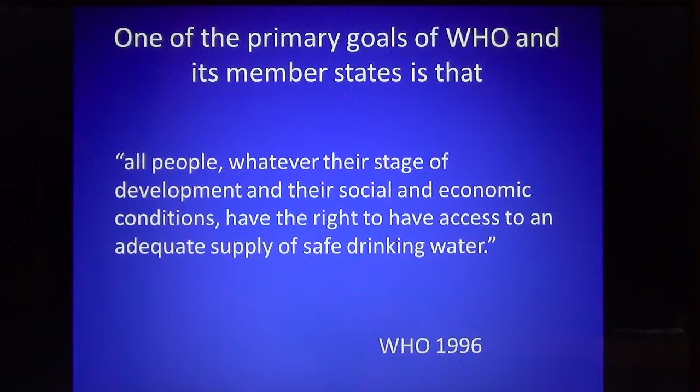This is a statement made by the World Health Organization in 1996 that all people have a right to a supply of clean, safe drinking water, and that should be no more true than here in Scotland, where we have an abundance of natural resources, in particular wind and water.

So what does happen when you build a wind farm next to a reservoir? Well, the first thing that happens is that heavy earth-moving equipment moves in to build new access roads. And this in itself is going to disturb and probably destroy the soil surface, but that's made worse by the deforestation, the cutting down of the commercial forestry. And all this will combine to churn up the surface soil and expose the underlying peat, which can become unstable and liquefied. And this peat may be up to 8 metres in depth, for example at Whitelee.

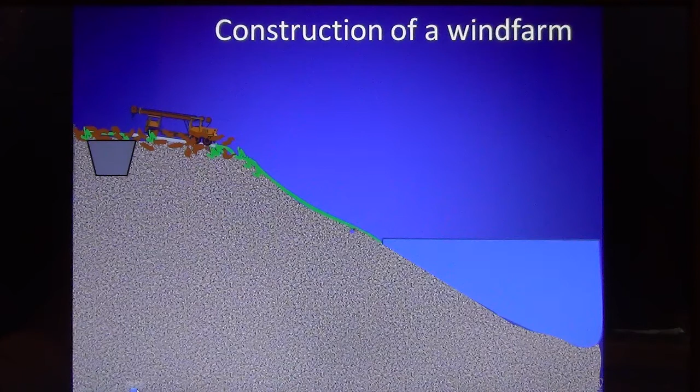All that is made even worse by the digging of turbine foundations, which can be up to 40 feet deep. And again, the multiple vehicle movements necessary to bring in the turbine components will only add to the surface disturbance. And all this together with drips from engines, gear oil drips, and the occasional diesel spill, combined with what in the west of Scotland is almost continuous rain, has the potential to wash downhill and into the reservoir.

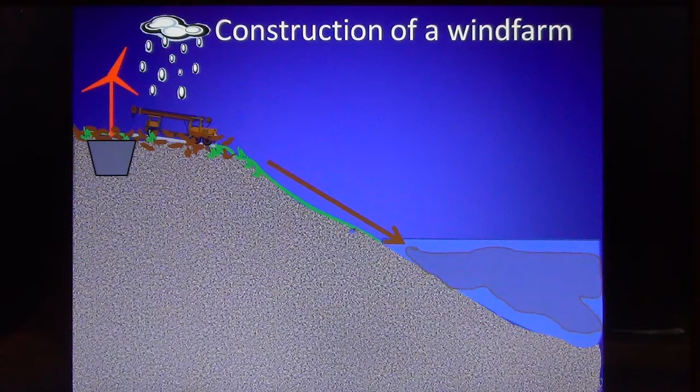But of course, any self-respecting wind farm construction company will tell you that they put mitigation in place to stop exactly this happening. But unfortunately, this mitigation, these sediment traps, are often overwhelmed by the volume of liquefied peat and the rain washing down, so that there is the potential still for these contaminants to wash into the reservoir and cause water contamination. And this is Craigendunton Reservoir, our local reservoir which supplies water to the Amlaird water treatment works to 50,000 homes in North Kilmarnock and the Irvine Valley.

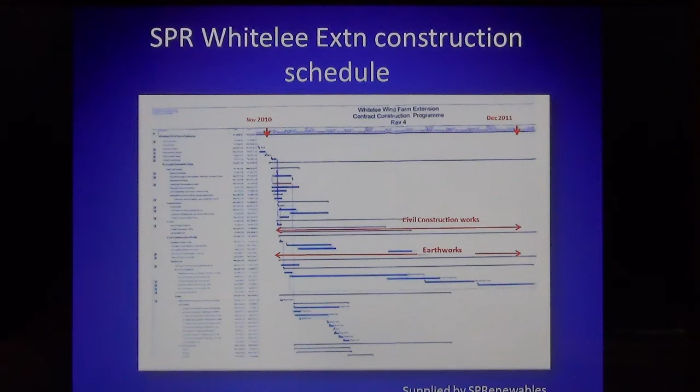Before we point the finger of blame at anybody for contaminating the water, it's important for us to understand what was going on in the construction period at any one particular time. This is an example of the Scottish Power Renewables Whitelee Extension 1 and 2 construction schedule, and I also have the original Whitelee construction schedule. What it shows is that most of the heavy earthworks occurred for the extension between November 2010 and December 2011, although it's apparent that a lot of these earthworks and construction works were going on after December 2011, and that was also apparent from site visits.

Let's look in a little more detail as to what actually happened in the raw water from Craigendunton Reservoir during those construction periods. Many Scottish reservoirs have a problem with brown and discoloured water, which is usually due to excessive dissolved peat, but also reflects the amount of iron and manganese in the water, and this can vary considerably over the course of the year according to the season and the amount of rainfall.

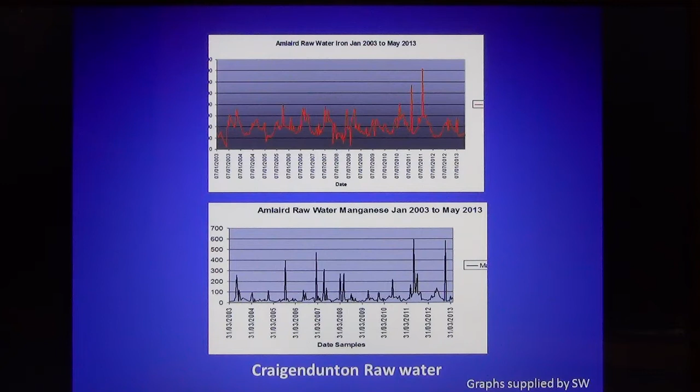But what happened here, if we superimpose the construction periods, is that during the building of Whitelee Extensions 1 and 2, the spikes of iron in the raw water almost doubled, and similarly the manganese content of the water also went up, much more than you'd expect to see with seasonal variation.

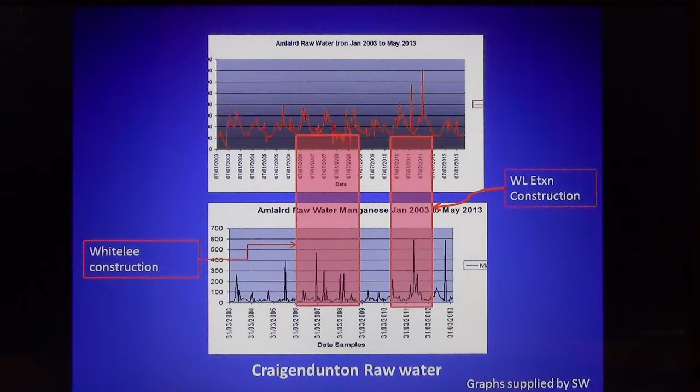During the original Whitelee construction, these changes were less marked because the turbines were very much further away from Craigendunton. And during this period in 2011, Scottish Water was successfully prosecuted for recurrent discharge of excessive manganese and iron polluting the nearby burn of Crawfordland from the Amlaird water treatment works. And you can see from the photograph below that this is really pretty disgusting stuff that's being discharged.

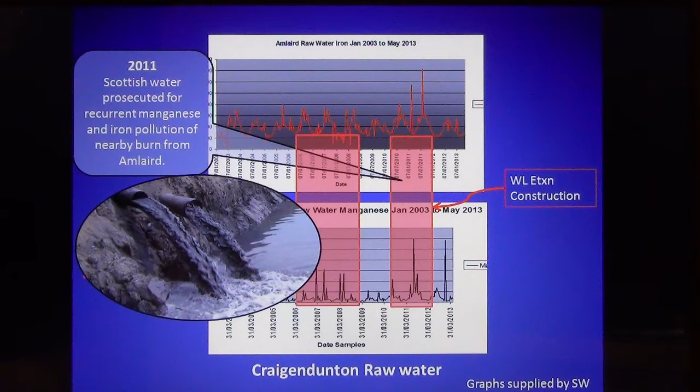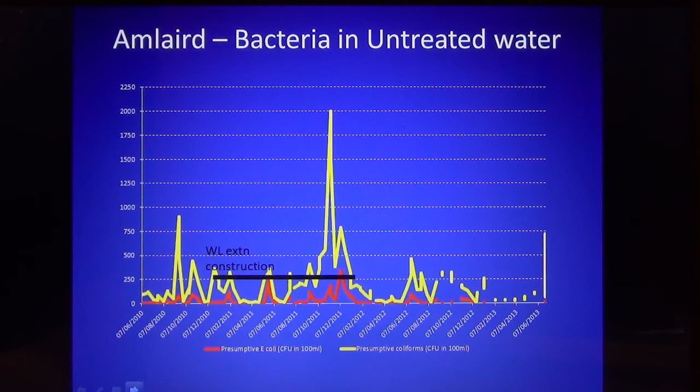But it's not just an increase in the amount of iron and manganese and peat in the untreated water that's feeding into the treatment works. During that construction period, there was also a huge spike in the amount of bacteria. And you might say, well, what does it matter? Because after all, that water is being fed into the water treatment works, and that is the function of that plant, to make the water safe for public consumption.

But Amlaird Water Treatment Works was largely rebuilt in 2005 at a cost of several million pounds, but that water treatment works was completely overwhelmed by the dirty water that was coming into it. And remember those discharges that were happening into the local burn.

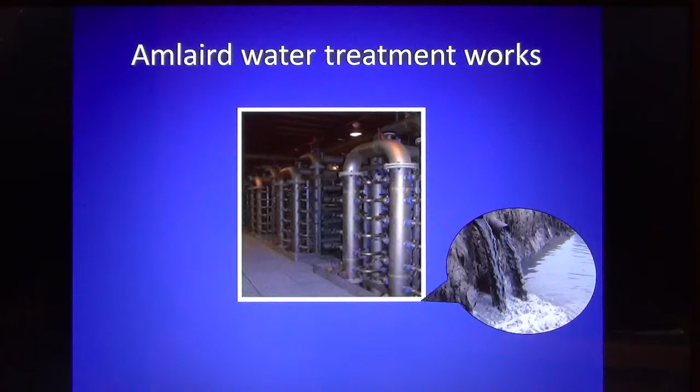So what does happen in a water treatment works? Well, this diagram is a very simplistic representation of what happens. The dirty raw water is fed into the treatment works and filtered as much as possible to remove any debris, as much peat as possible, and also iron and manganese. Chlorine is then added to the residual water to make it safe to drink.

Unfortunately, the reaction of chlorine with any residual organic matter in the water produces noxious substances called trihalomethanes within the public water supply. And I'm going to talk in more detail about what these substances are.

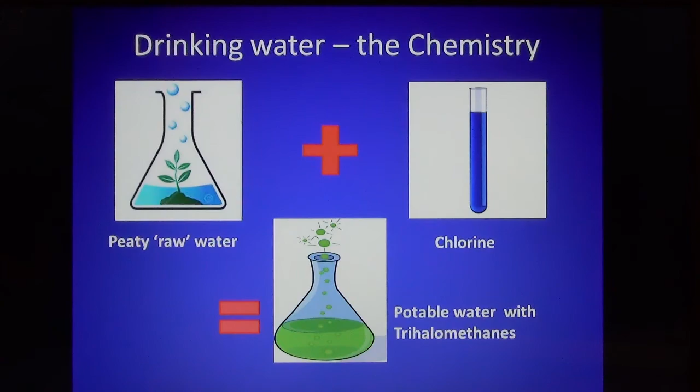What are trihalomethanes? Well, the Drinking Water Quality Regulator for Scotland defines these trihalomethanes, or THMs for short, as compounds that form when you add chlorine to disinfect water that contains organic material. So this only occurs in the public water supply. It doesn't occur in private water supplies where no chlorine is added.

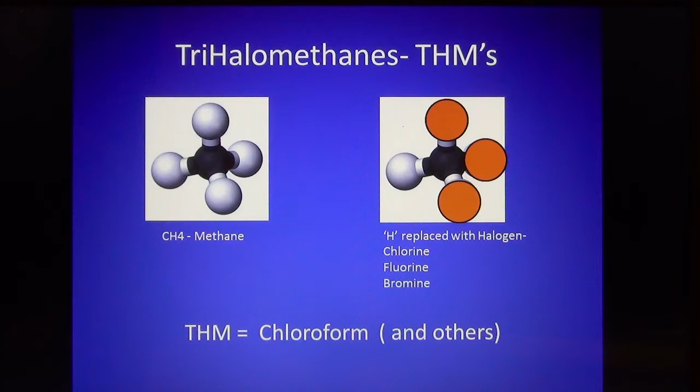At a chemical level, a trihalomethane, a THM, is essentially just a molecule of methane, which is carbon surrounded by 4 hydrogen atoms, and when you add chlorine to this, these hydrogen atoms are replaced by the chlorine atoms. You can add other halogens such as bromine, and this produces a more complex molecule, but usually it's chloroform that is the predominant THM that's formed.

But she doesn't know how lucky she was. Chloroform is actually a poisonous anaesthetic agent which is no longer used. It can cause acute liver failure and acute kidney failure. So this could well have changed the face of the monarchy forever.

But it's not the large quantities of chloroform that we're concerned about here. It's small quantities of chloroform that are absorbed and ingested over a number of years. And it's looking at the long-term effects of what this does to us. This is truly a smoking gun.

Do you remember this photograph? This shocking image was taken by Mary Beith, a journalist who undercover infiltrated the laboratories of a tobacco company who were forcing these beagles to smoke up to 30 cigarettes a day to try and prove that they didn't get lung cancer. Of course, we all know differently now. But it took Mary Beith almost 6 months to get this photograph published in papers.

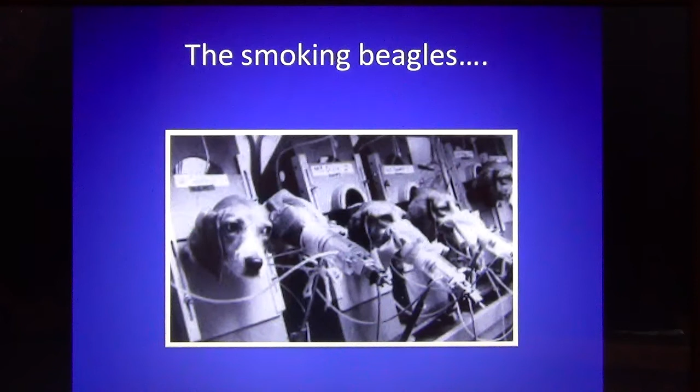And it took more than 50 years for tobacco companies to admit liability, to admit that cigarettes cause lung cancer. And we all know, of course, that cigarettes and carcinogens in tobacco do cause lung cancer. And this is put on the back of cigarette packets in Canada to try and persuade people not to smoke.

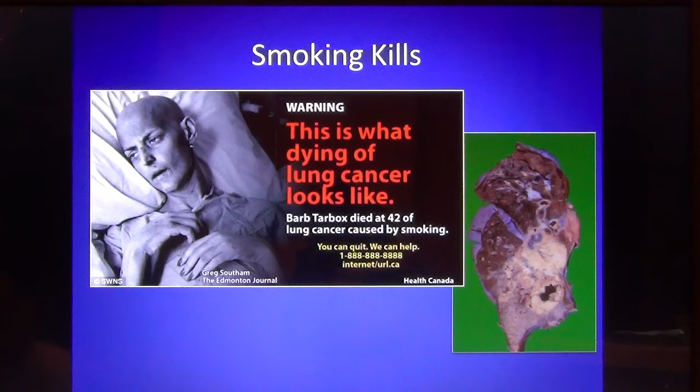And trihalomethanes are probably carcinogens. This means that they can cause cancer just like cigarettes and asbestos. But the cancer-producing effects of carcinogens often take 10 or sometimes even 20 years, by which time the underlying cause of the cancer has often been long forgotten.

But the effects of raised THMs in water are recognised as a problem worldwide by water authorities, and as such, regulatory limits on the amount of THM in water are set, also here in Scotland.

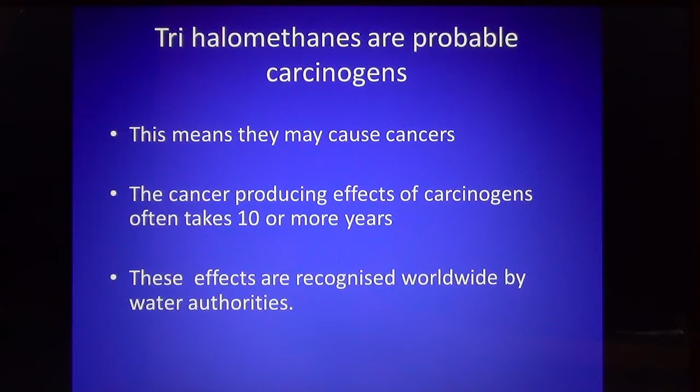Most of the experiments showing that THMs can cause cancer have occurred in laboratory animals, mice and rats, and in these animals there has been shown to be an increase in liver cancer and also kidney tumours. And these validated experiments have been recognised by the World Health Organization, who have set their own regulatory standards for allowable limits of THMs in public water supplies.

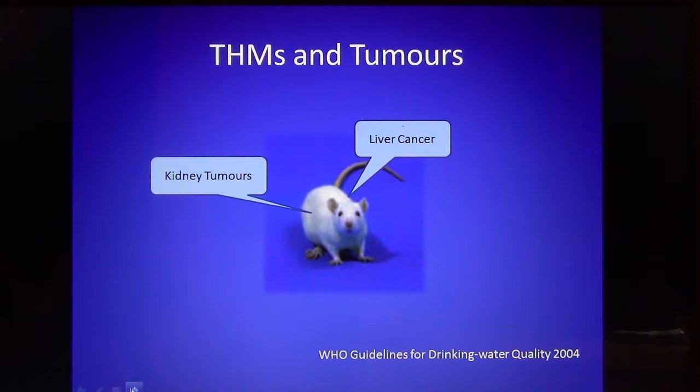But man is neither rat nor mouse. Man lives for 70 to 80 years compared to the approximately 2 years for a mouse or a rat, and laboratory animals are exposed to high levels of THMs, whereas man has the potential to be exposed to low doses for a much longer period. So the problem is that the biological effects are probably different, and the potential for different cancers are also probably different.

Obviously, you can't experiment directly on people, and so most of the studies that have been done in North America look at populations where they normally have a higher than average amount of THM in their public water supply, and looking at the increase of cancers or other illness over what would be expected as a background.

And these population epidemiological studies have shown that there is a higher than expected rate, particularly of bladder cancer, but also of rectal cancers. There are some other effects too, such as fatty livers and changes on fertility, but these effects are generally less well substantiated.

What's important to realise, though, is that chloroform can be absorbed through the public water, not just by drinking it, but also through the skin. So, for example, if you had a shower, you would absorb water not only by ingesting it, but also through inhaling it in the steam and also through your skin in the hot water.

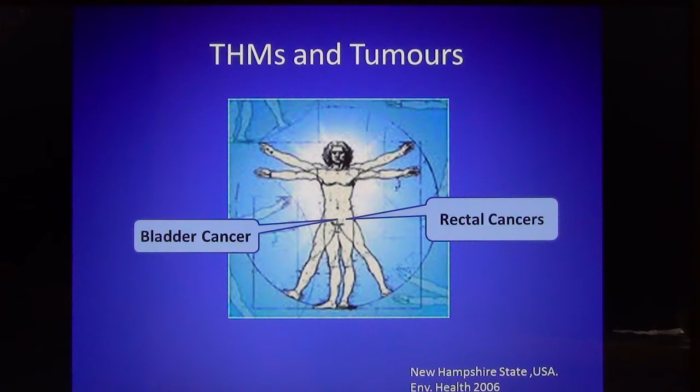And the reason the USA set a lower standard or lower limit for THM in the public water is because they recognise that the chronic long-term effects of THMs in the water and the effects on the population are not yet fully understood, so they take a much more cautious approach than here in Scotland.

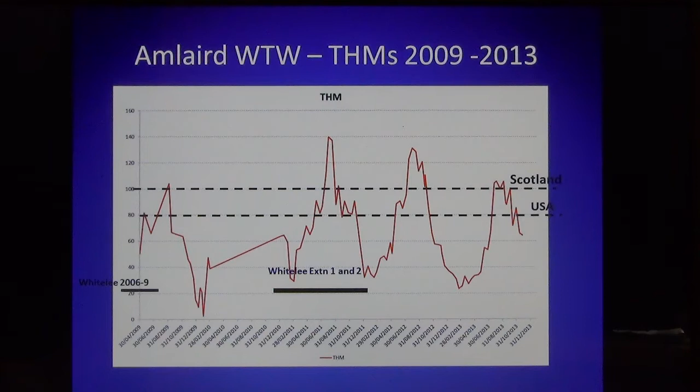What we're looking at here is the second of those peaks and why we apparently had further spikes occurring after that maximum construction period. And unfortunately I don't have all the data from Amlaird, but what this shows is that this spike in the THMs, the red spike here, was really caused by the huge spike of organic matter, of carbon, within Craigandunton Reservoir water, within the raw water.

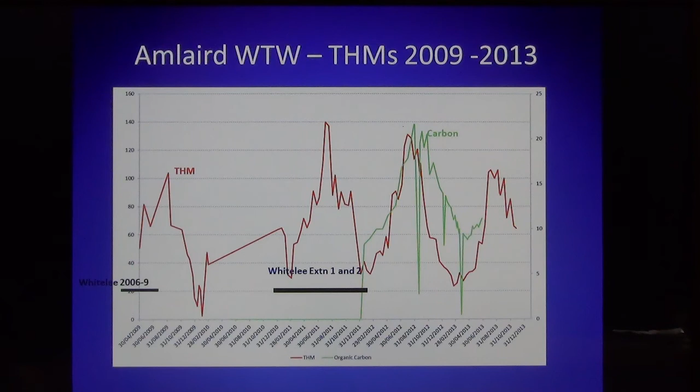You'll remember that I said that THMs are only formed when you add chlorine to water that has a high organic content. This is exactly what happened at Amlaird. Scottish Water set a regulatory limit for the amount of chlorine that can be added to water to make it safe to drink at 1 milligram per litre, although most people can actually taste chlorine in their water at half this level, at 0.5 milligrams per litre.

But during that construction period at Whitelee, the amount of chlorine that was added at Amlaird water treatment works to the public water was more than double the allowable limit. And this contributed to the formation of THMs in the public water supply. Most English water companies will aim to keep the amount of chlorine added to the water at 0.5 milligrams per litre or less. So why did Amlaird add quite so much chlorine to the public water?

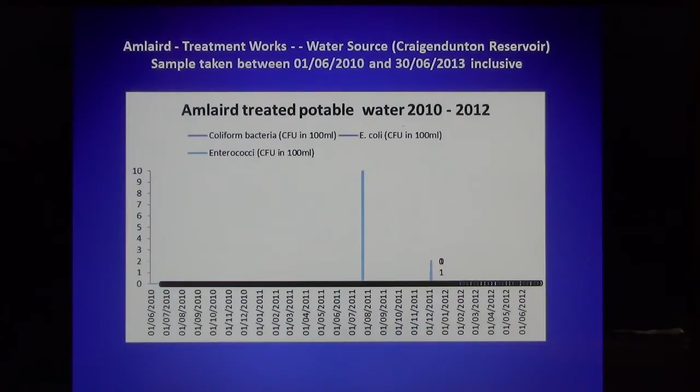So did they succeed? Was the public water supply safe to drink? Well, the one standard that Scottish Water really strive to achieve is that the water should have a 0 bacterial count. And in this critical period of 2011, during the construction period, you can see that Scottish Water didn't even manage to achieve that standard, that there were bacteria in the public water supply despite the amount of chlorine that had been added.

And let's not forget, Scottish Water is a publicly owned body, and this is publicly owned land, our land. And there are 80,000 acres of that land and more, all ripe for renewable development. So perhaps that explains why Scottish Water were a little bit coy about admitting that there were water quality problems on land which has turbine development. They stand to gain millions of pounds over the next 25 years in rent from various renewable energy companies for allowing that development, that industrialisation of our water catchment areas.

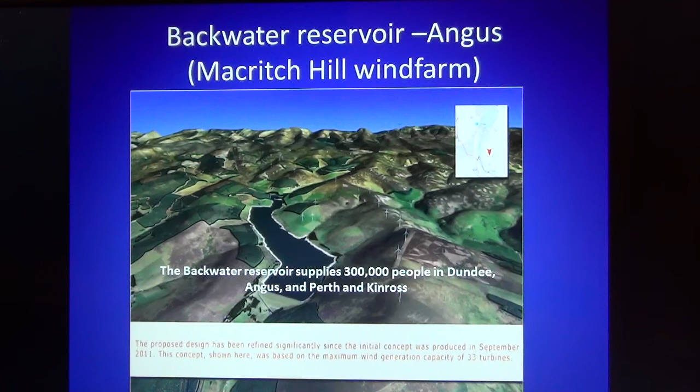Originally, its 33 turbines were proposed to be sited on the top of the hills surrounding the reservoir, but because this is right next to Cairngorms National Park, which is top left in this photo montage, it was judged that the visual impact was too great on the national park. So more recent plans have sited these turbines much, much closer to the water's edge. And now, of course, we're very much aware of what happens to the water quality in the reservoir when you construct a wind farm. And this reservoir doesn't just supply 50,000 people. This reservoir supplies 300,000 people with their water in Dundee, Angus, Perth and Kinross.

This is like playing Russian roulette with people's health. Which person is going to fall ill in the future because of this wind farm development? But Scottish Water stand to gain approximately £300 million a year from renewable energy developments on their, or our, land, and this is set to increase 15-fold in 7 years' time by 2020.

And I'm not the first person, and I'm sure I won't be the last person, to notice that Scottish water quality is worse than in England and Wales. Jane Bradley, writing in The Scotsman in 2013, wrote that almost 3% of more than 15,000 water samples taken did not comply with standards for trihalomethanes. I think that is a shocking indictment.

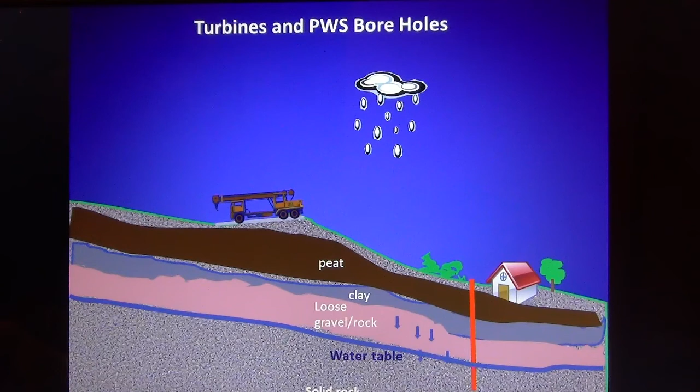So when you have a wind farm construction that's uphill from the borehole, the first thing that happens is that the earth-moving equipment moves in and constructs the access roads. Then there is the digging of borrow pits or quarries, and these will extend down to a depth to be able to access the loose gravel and rock and the solid rock to form turbine foundations and more access roads. The turbine foundations, down to about 40 feet or so, are trying to access the solid ground, often the rock, so that the turbine itself is stable.

And the effect of digging effectively these holes through the various layers of soil and clay means that any surface water which has been contaminated with diesel drips, gear oil, even loose soil, has the potential, instead of being filtered through the various layers, to go straight down and into the water table and then running much unimpeded downhill, where the domestic borehole can effectively suck up the unfiltered water.

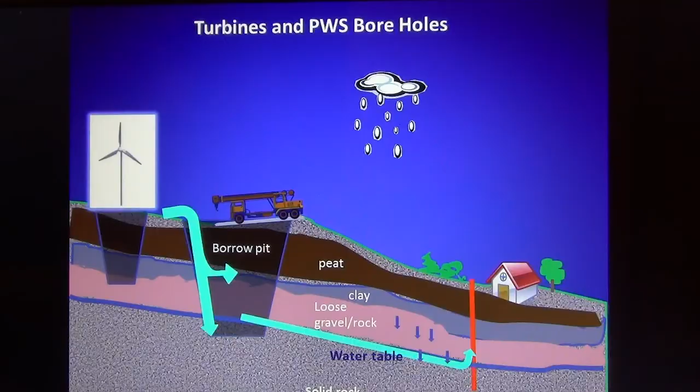So what happened to our private water supply? Well, our private water supply comes from an underground spring with the water catchment area now covered with Whitelee turbines. Scottish Power Renewables never bothered to find out where our water was coming from before they built the wind farm. Our water goes into a collection tank where it then serves 10 properties. Scottish Power Renewables had been monitoring our water for 7 years during the various phases of development.

During that period, several of us in our small community were actually seriously ill, along with some of our guests. What Scottish Power Renewables didn't tell us and didn't tell any statutory authority was that we had very severe bacterial contamination of our water. At one point here in 2010, 170,000 bacteria per 100 mils of water. That's like drinking an untreated urinary tract infection, and it's no wonder so many of us were ill at various times.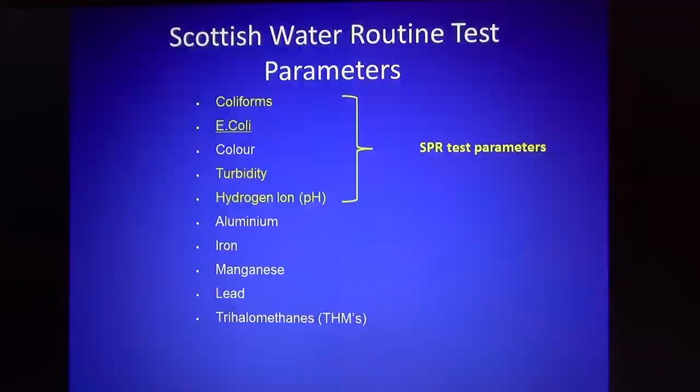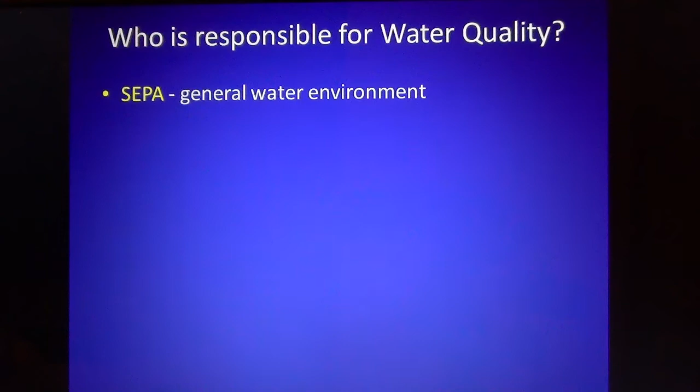So who is responsible for your water quality? Well, SEPA, the Scottish Environment Protection Agency, are responsible for the general water environment, so the water runoff in ditches and rivers from the development site. They're also responsible for making sure that any diesel spills are properly cleaned up. The Drinking Water Quality Regulator is the watchdog for standards of Scotland's water quality for both public and private water supplies. And Scottish Water are responsible for testing and supplying public water.

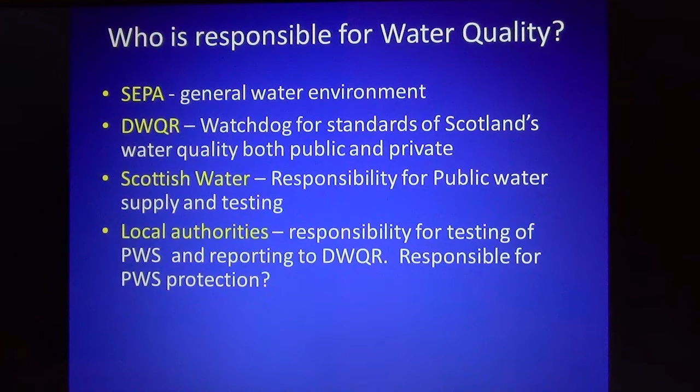The local authority is responsible for testing of private water supplies, perhaps at the householder's expense, and reporting those results to the Drinking Water Quality Regulator. They are, in theory, responsible for protecting private water supplies, although I found this to be a somewhat grey area. But the wind farm developer is responsible for actually testing private water supplies during construction. And that seems to me like putting the fox not in charge of the hen house, but in the hen house.

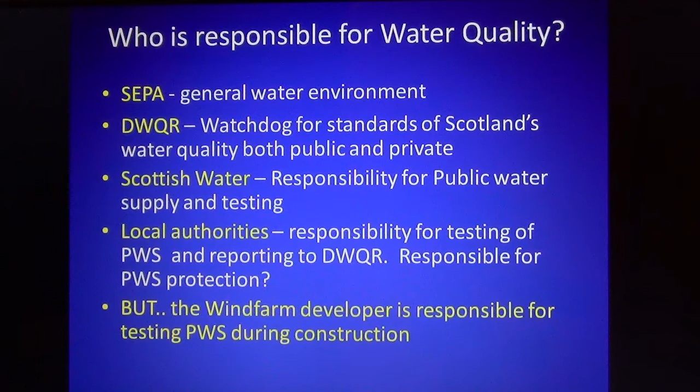Nobody seems to take responsibility for telling the wind farm developer what to test for and how often to test for it. When I was looking into the scale of the problem of water contamination caused by wind farm construction across the UK, I was horrified by what I found. I think the public have been blinded by thinking that renewable energy is green and therefore kind to the environment. This is what's happening in our own country.

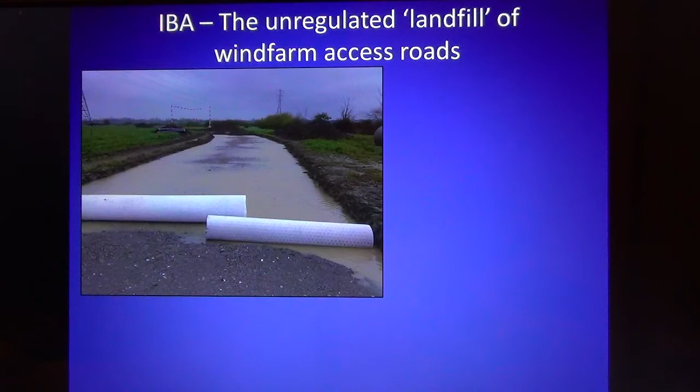This is in Essex. This is Bradwell Wind Farm, and here is a wind farm access road being constructed. In the foreground there's this rather grey amorphous material here, and this is incinerator bottom ash aggregate, IBA. This is a period of heavy rainfall, as you can see, and the road is flooded. And on either side of this access road is prime agricultural land, I think probably potatoes growing here on the left. And this is a closer look at this grey aggregate.

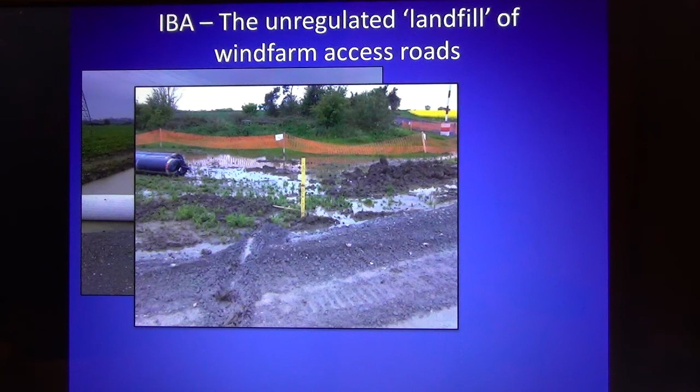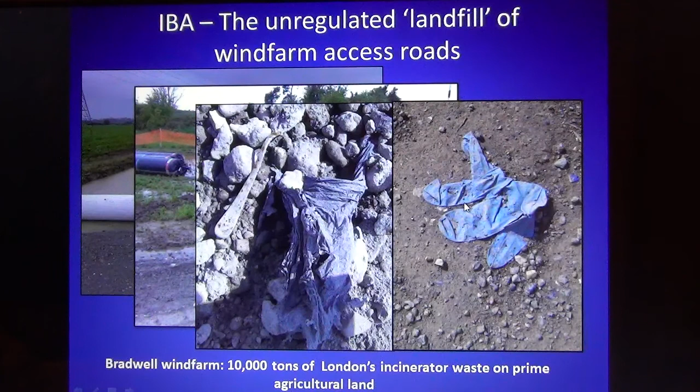You can see that it's very unstable, it doesn't bind very well, and it's washing away into the adjacent water courses. And this is 10,000 tonnes of London's incinerator waste being dumped on prime agricultural land. Totally uncontrolled landfill. There is no idea of what's in it, but what you can see here is that there's half-burnt bits of plastic, cutlery. There's even a blue nitrile glove, the kind of thing that you would see in hospital clinical waste. You could make a real meal out of it. But what kind of toxins are leaching into the water supply?

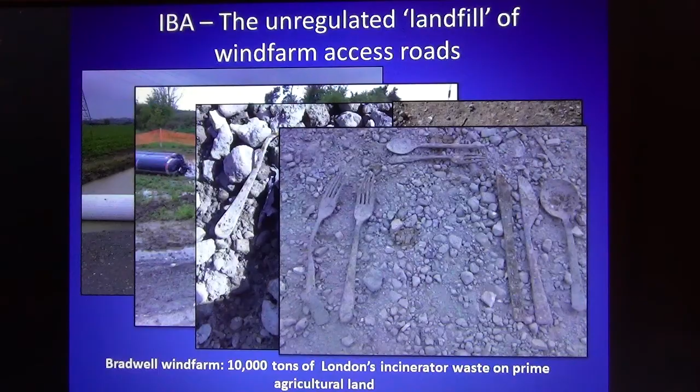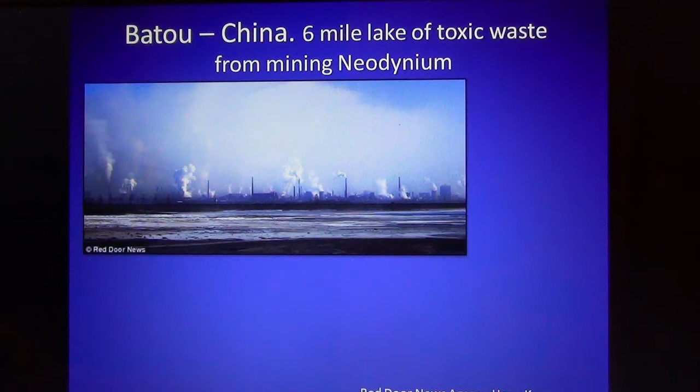So where are we now? I think we're in a long, dark place, and nobody seems to want to listen. I think our government have been blinded by the short-term gains of renewable energy, potentially at the expense of our people's health in years to come. So if nobody is listening, is there anything we can do? Well, I think there are things that we can do that will help.

You need to lobby your MP or MSP and find out what effects wind farm developments will have on your reservoir water quality and public water supplies. If there are wind farm planning applications in the pipeline, check that your local authority asks for a geohydrology report in the environmental statement. Look at the impact on private water supplies and on reservoir water quality. And lastly, if you live in Scotland, you can apply for an £800 non-means tested grant if you have a private water supply, and this will at least remove the bacteria from your water.

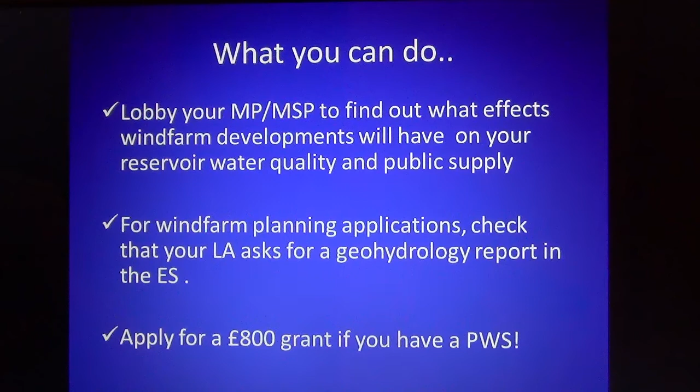1 in 3 people in the UK will get cancer. Scotland has some of the worst cancer rates in Europe, and on the 29th of July, the BBC News reported that cancer rates have actually increased in Scotland. So if you're one of those unlucky people who gets bladder cancer or rectal cancer in years to come, will you be wondering whether the water that you drank today has contributed towards that? We shouldn't take water for granted. It's a precious resource, but we do need to question what comes out of our taps.